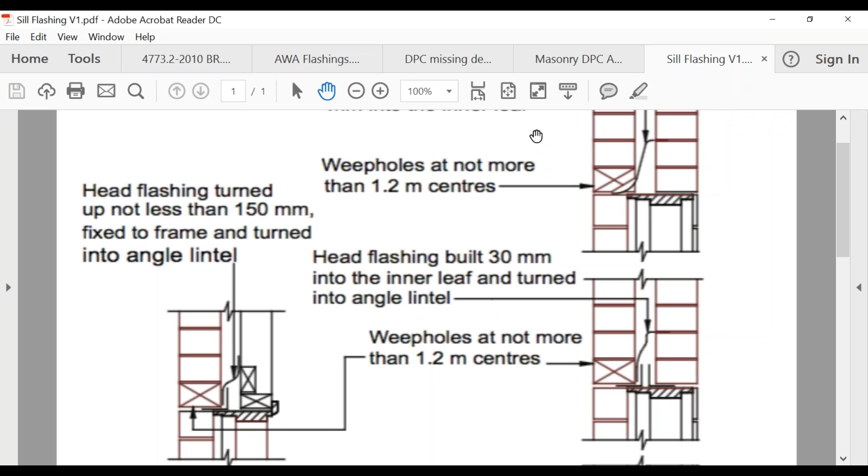One thing I'll show you, you'd have one copy of this, probably just one page. I think you guys have this in your study buddy, that folder you get given when you come to class, but I've got the whole booklet. I'm going to send this out to everybody tonight.

This is basically the Australian Window Association document, and it steps through how something should be installed, how it should be flashed, and so on. It's a pretty good document where it gives us, as far as the industry is concerned, how we should correctly install windows and doors.

I'll quickly flick over a couple of parts of it. This is just your normal standard-type layout - it talks about the objectives, who they acknowledge, and so on. We're more concerned with the contents, which talks a little about the building code and things like that. But then we get to installing frames correctly.

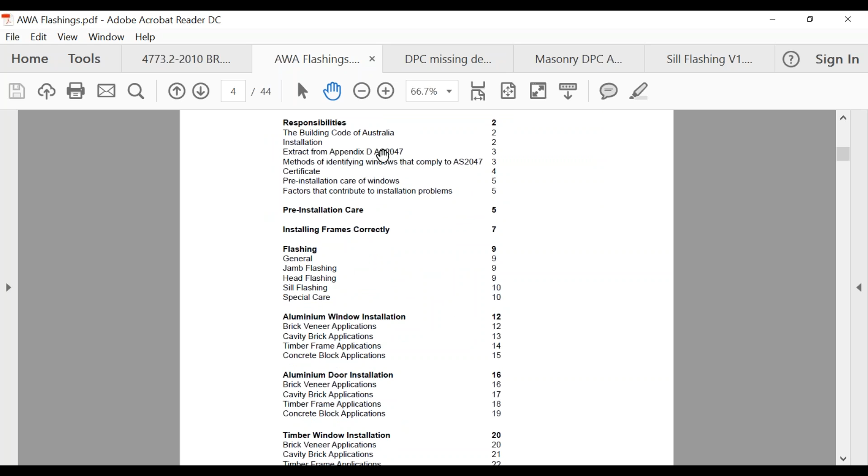When we get to our flashings, it's broken down into general flashings, our jamb and head flashings, our sill, and then aluminium windows - how we'd do that on a brick veneer application, cavity brick, timber frame, and concrete blocks. Then the same sort of thing for aluminium doors, timber window installation and timber doors, then UPVC window installation and the same with doors.

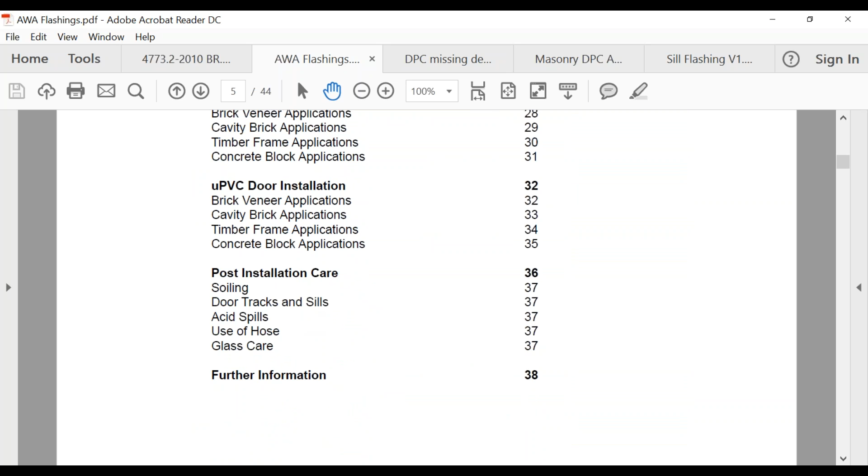And then it talks a little bit about our post-installation care. So something you're not overly familiar with is flashing of your windows. This is really a great tool for that, and it's pretty easy—you can just look at some of the pictures.

So this is pretty basic stuff too, but it starts to show you about when they actually get delivered on site, how we should be basically storing them and things like that, which is pretty self-explanatory.

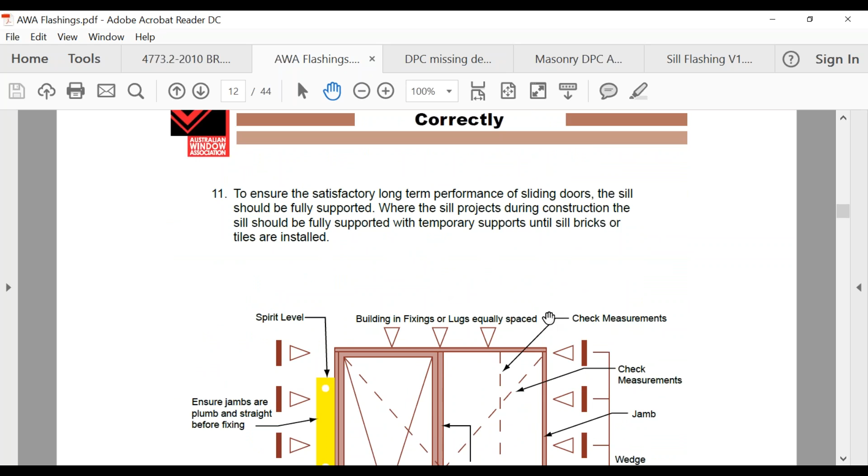But I just want to scroll down to some pictures, and this one even talks about, if you're like a DBM and you're not too sure how windows get installed, it starts to basically show you how we should be installing it, how we're checking it for plumb, how we're checking it for level, and it talks about putting wedges in the side so it actually stays plumb and level. Then it says something about having a gap at the top, between the head of our window and our lintel, and it talks there also about the fixings we should be using.

And there's some stuff here that talks about flashing, and I'm just going to quickly go over the different photos that it shows us, because it'll make a bit more sense.

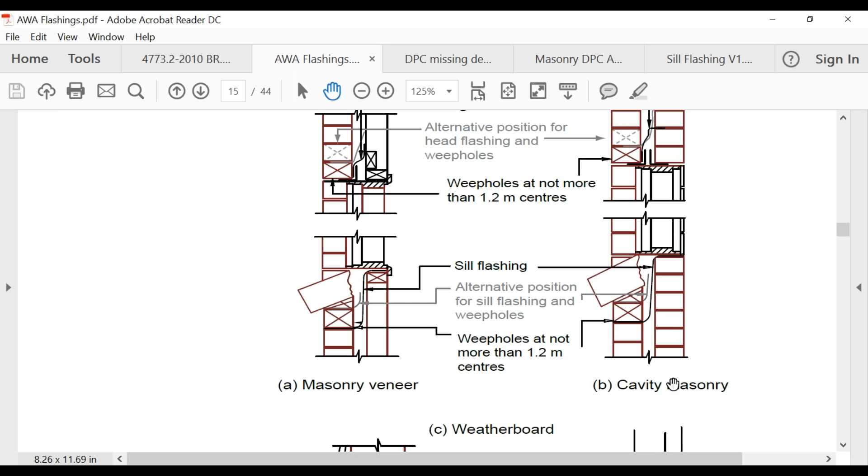I think this one here is very similar to the ones you guys have got in your book—I'll make that a little bit bigger. So it's basically showing us here that this is double masonry, or full masonry, or what they call cavity masonry, and it's showing us here we've got our sill brick, and we've got a couple of different alternative positions on where we can put that sill flashing underneath, and then it's got our weep holes and so on.

And then it does basically the same for above our windows, and then it gives us some alternatives down here for our weatherboards. So you probably heard me talk about it before, guys.

I'm actually from Queensland, and pretty much everything I ever did was weatherboard, and these are some of the different flashings we used to have to put in basically under the lap of the weatherboard, and then come over our window so it didn't get in. And then some sill ones you can see here as well.

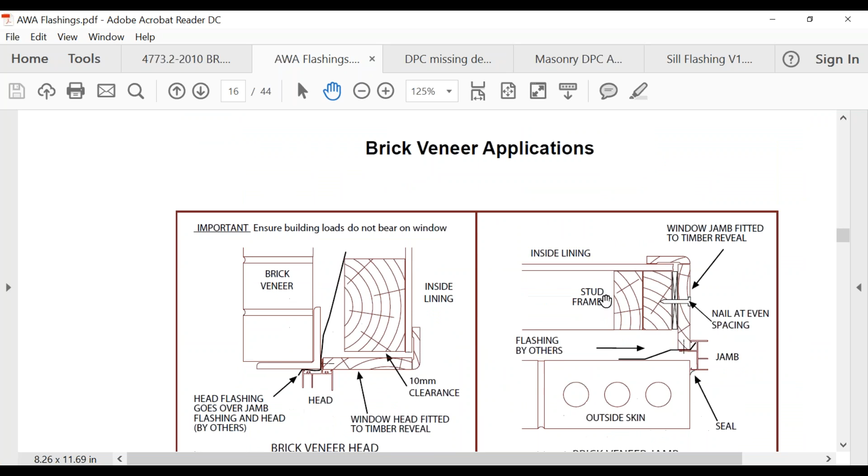So then it gives us some other ones showing us this in our brick veneer applications. So it's obviously showing here this is our brick, this is our lintel, and this is the internal linings with our lintel and so on, and then how that needs to be flashed.

So we can see that going up to our frame, coming down and then coming out there underneath our lintel so the water comes out. So you'll see there's different scenarios for it. There's probably a better close-up picture of how that sill flashing works, and then the alternative where it actually sits under the sill brick.

And I just want to show you too, there's some other ones here where it starts to show us about our aluminium windows when we're using our core-filled blockwork. So on these ones here, this is your concrete block applications.

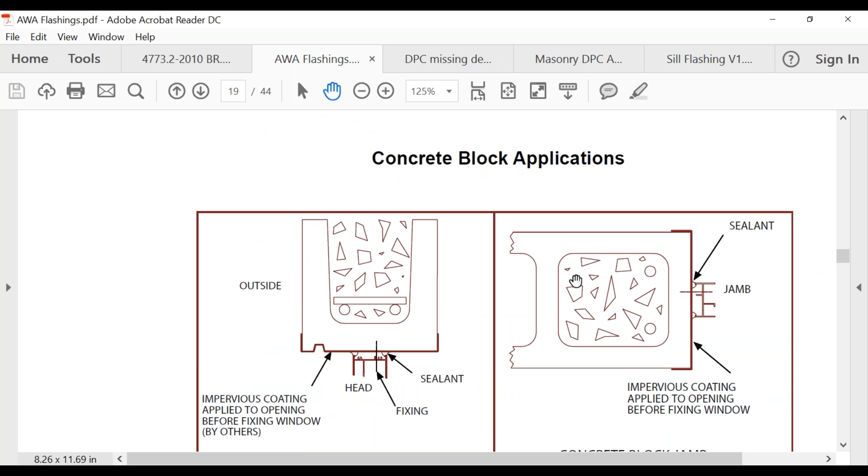This is another thing too, which was quite big when I was in Queensland. I see it a little bit down here in Victoria, where people, probably more for basements and stuff like that, use the concrete blocks and they core-fill them. And it starts to show us here how you can get these sill blocks and how the windows are fitted in with our sealant and so on.

And then you can have your sill tile—that's pretty common, I know you guys have seen that a fair bit. And then they have some sort of lip here, I suppose, which basically stops the water getting under our frame, and then it comes onto our sill brick and comes out. So there's a few different scenarios there, and then it goes on to our doors and so on.

So I'm not going to read through it all with you or be here all night, but I will actually email that over, and I just wanted to touch base on it because you guys get this picture here in hard copy, and that's about it. But I think that's a pretty handy document, especially if you're not physically installing windows and you want to know a little bit more about how it needs to be done.

From here, I'm going to go through the Australian standard and talk about things we need to understand, including terminology. I'm a shocker for calling stuff what I call it on site, and then when I open up the standard, it's not called that. What I call brick veneer is referenced as masonry veneer, and what I've always called double brickwork is called cavity masonry - that's two walls of brickwork with a cavity in the middle. We want to get familiar with the terminology, so if we're asked to do a design and they say masonry veneer, we know they mean a timber frame with one skin of brickwork on the outside.

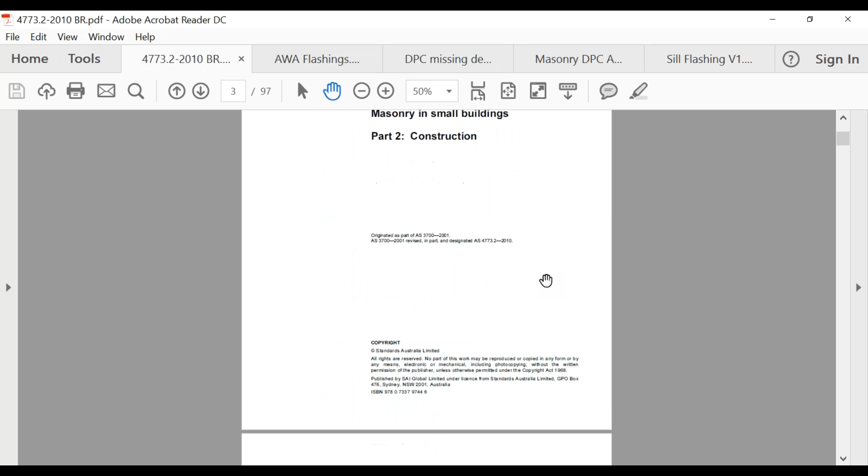A few other things I want to talk about are the different types of control joints. I'll work through here and highlight the parts I think need attention. I find this standard, maybe because it's not as big as the others, pretty easy to navigate through. If we don't have any bricklayers here, I can probably say we wouldn't make it too big for them, otherwise they wouldn't understand it. So bear with me as I scroll through the pages - you might hear my hard copy flicking over as I'm scrolling down.

The first is on page 9, and I'll make it bigger so you can see it. With your brickwork, you have what are called control joints. A lot of people just call them contraction joints, or expansion joints, or articulation joints, and aren't aware they're actually control joints - but there's actually 3 different types. It says joints or gaps constructed in masonry to control and absorb movement in the masonry.

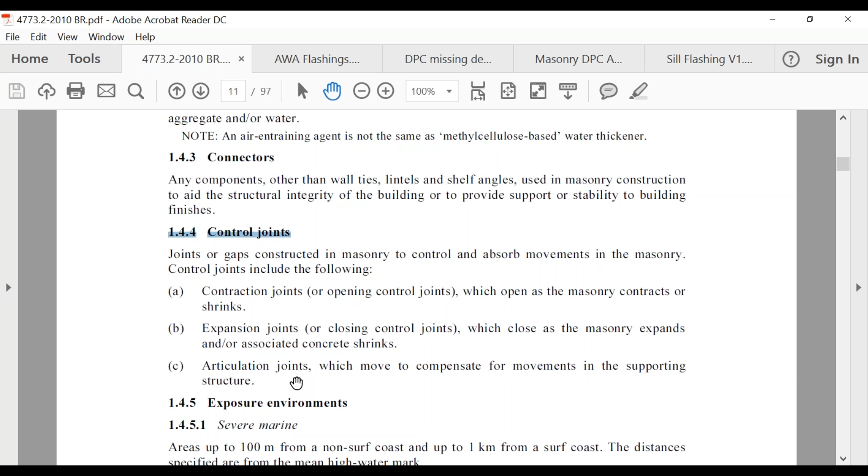Control joints include the following: contraction joints, which open as the masonry contracts or shrinks; expansion joints, which close as the masonry expands or as the associated concrete shrinks; and articulation joints, which move to compensate for movement in the supporting structure. It's probably not something you'll be asked in your interview, but it's worthwhile getting familiar with it, because you might see a question about a contraction joint and think, hang on, isn't that an articulation joint? All 3 are actually control joints, and depending on what we're trying to control depends on which one we use. When I go through the standard I'll explain in more detail what they actually do.

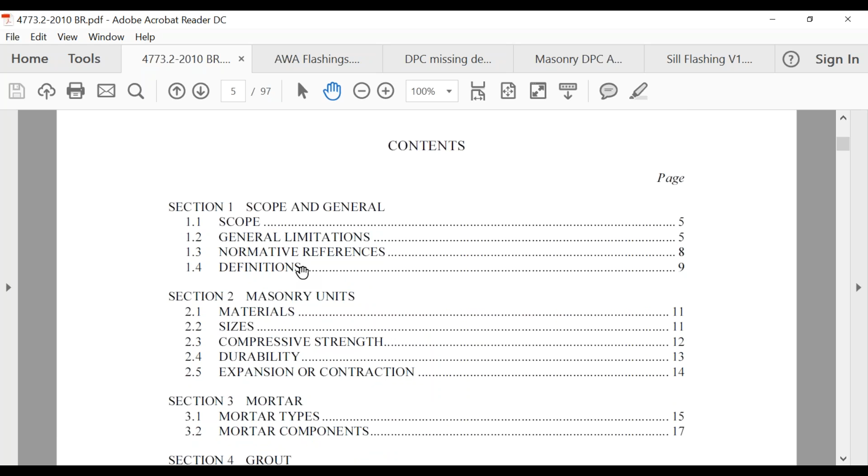When you're reading any of your standards and you're not too sure exactly what something is, come to the front of your standard where it's got definitions. You go to the definitions page, or back in the table of contents, and you'll see under section 1 is normally our definitions. So if you're unsure of something and think, geez, what's that, you go to your definitions section and it'll probably tell you what it is.

Even with stuff like single leaf masonry or similar terms, if there's any wording you're not familiar with, go to your definitions as your first point of reference to try and understand it, in case you're stumped in your multiple choice or during testing. As we covered when we did slabs and footings, if it's a symbol, you'll usually find it in the definitions under symbols.

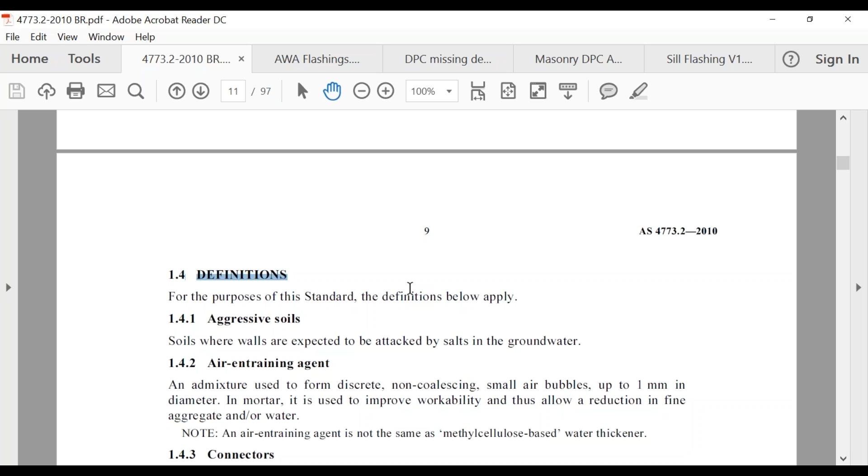So if it was a symbol, say DS which had to do with the depth of our pad footing, or that might have been DL when we did our Australian Standard 2870. If you looked under DL, you'd go, oh, it's not there. But when you scroll down further, you'll see there's a section in the definitions that relates to symbols, and all those symbols and abbreviations are under that section. So that's a little bit on our control joints.

I'll scroll down and show you the parts I mentioned that I think we need to highlight. But we'll do a few little things too if you haven't done this exercise or module before, just trying to find some random things in the standard.

There's one in there that's got to do with something to do with marine grade. I've got the question here. Yeah, like the durability of the mortar, and it talks about a marine grade.

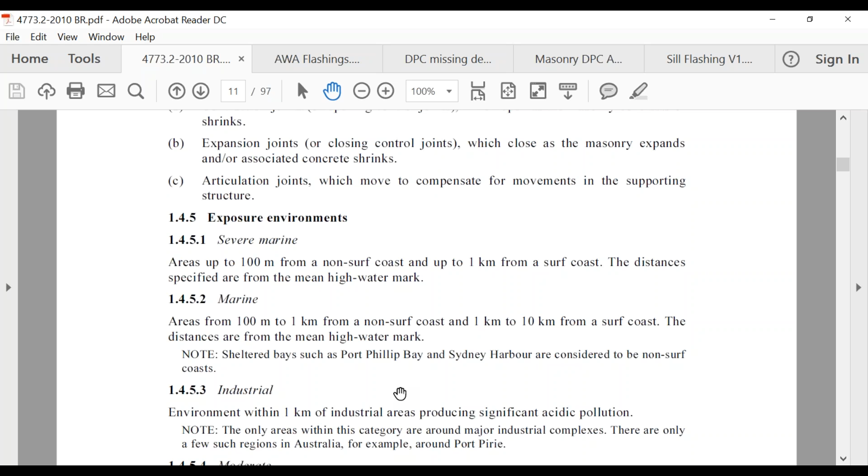Now, something like that, you're probably not going to be asked in your interview, but it's just things like that to try and get you used to being able to navigate through these standards and codes we use, because we can't always give you exactly what the VBA is giving you, as they might change it tomorrow. So you want to have that skill set on your own to actually find something, not just me showing you where it is in the standard.

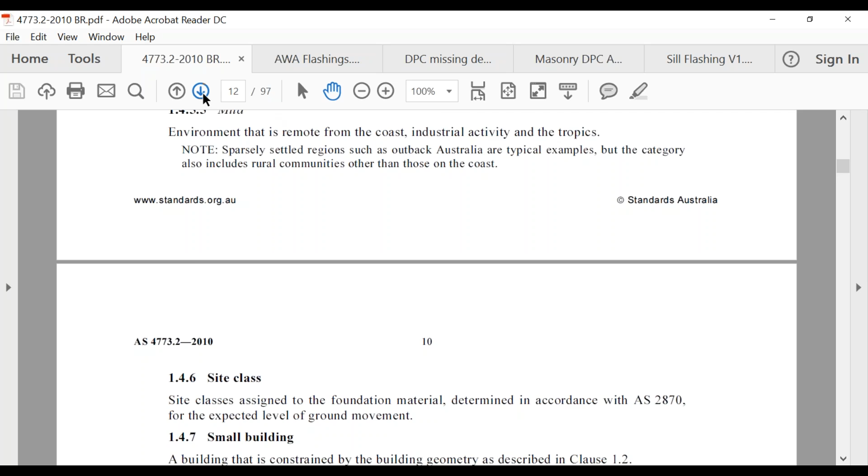All right, just bear with me and I'll find this next page that I need to get to so we can talk about it and highlight it. This is something we did basically a couple of weeks ago. I'm sure we've covered this enough before, but it is actually in your standard.

A few weeks ago we spoke about where our vents need to be for our subfloor ventilation, and it's actually in here as well. This is very similar to what's in our building code, and it tells us that in our brickwork, the vents need to be placed no more than 600 millimeters in from the corner.

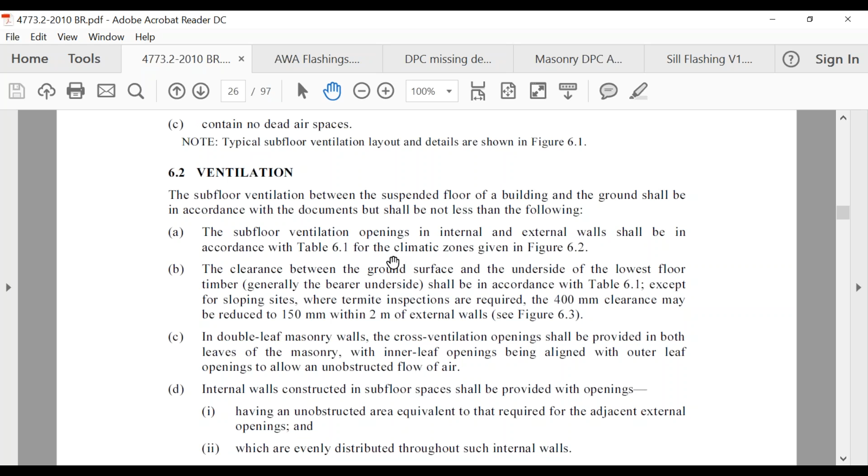And back here, if you needed a bit more reading on it, it does talk about the ventilation in there. But we would have done a lot of that when we covered our subfloors and highlighted our building code then. One thing we did do when I spoke to you about subfloor ventilation was about the different climate zones and the amount of square millimeters those vents need to be for every linear meter of wall.

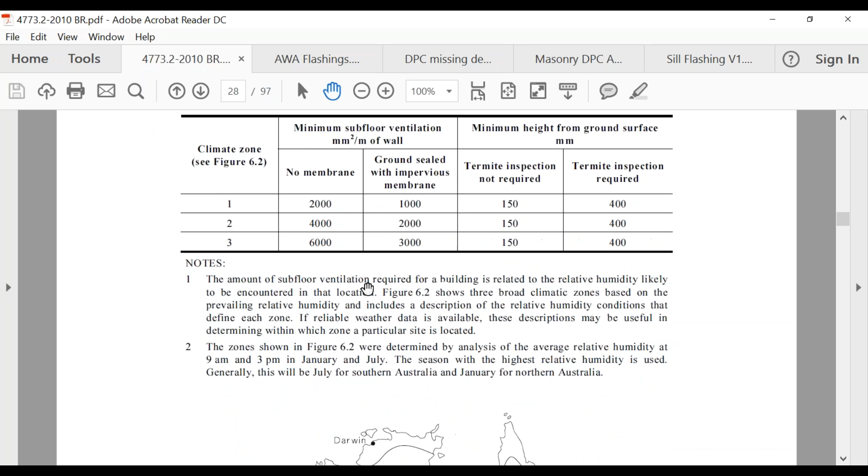So this was in our building code, but it's also in your standard for masonry as well. If you're wondering how that works, it gives you a bit of a definition down here about the different zones we use, and those zones are related back to this table. But it's very unlikely you'll be asked that - you might be asked what the zones are, but you're not going to have to remember how many square millimeters a certain vent is, like we did in class.

All right, so this is one thing. I haven't had any feedback from students that have gone through and been asked this, but this was one thing that Steve, the training manager, used to make sure the guys highlighted so if they were asked they could find it. It's got to do with our engaged piers. So the main part is this part here. I'll just read through it.

It says, when we're using engaged piers, the spacing of engaged piers shall be specified in the documents and when constructed shall not vary from the spacings by more than 20%, and the thickness of the engaged piers shall not be less than the greater of - so they shouldn't be any less than 100 millimeters, and that's including the 10 millimeters of mortar.

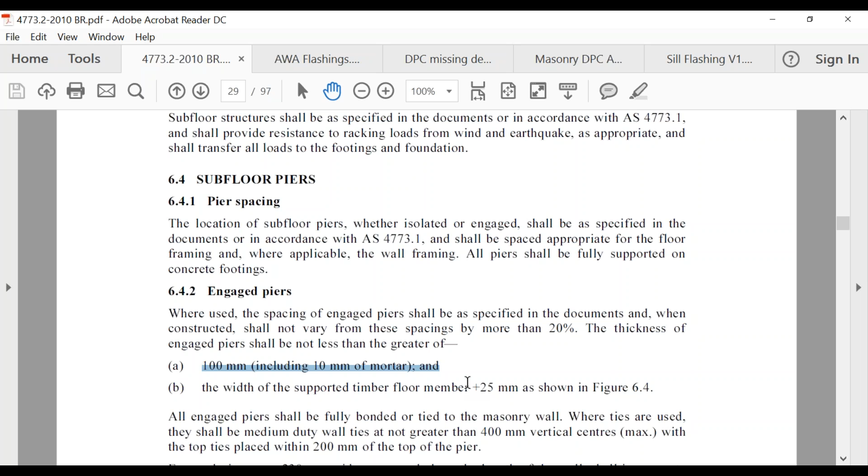So yeah, that was just one thing some guys were occasionally getting wrong in a multiple choice. So I've just highlighted that. If you guys got that question, no doubt you'd be able to look in your Australian Standard, find your section on engaged piers, and hopefully that would then stick out to you because you've highlighted it.

I did brush over this, but only because we covered it a few weeks ago. This is exactly what was out of our building code, showing our minimum height requirements, basically 150 down to 400 over a 2 metre period. And then it shows us obviously we've got our vent passing through there.

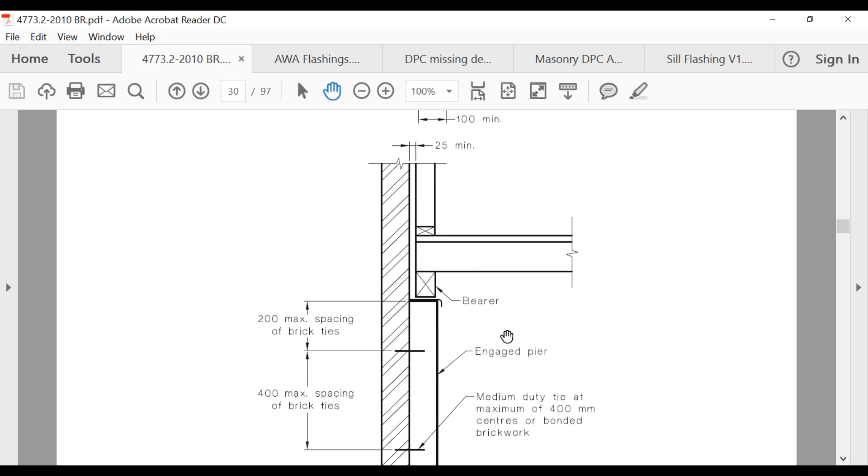It depends on how you like to find your stuff in your building code. Personally in my standards and building code, I'm sort of more of a visual person, so I actually highlighted this one here where it's showing our cavity. This one shows we've got some sort of engaged pier, our bearer sitting on it, then our joists, our flooring and our wall, and then it's got our cavity. So our cavity on that is a minimum of 25 millimetres.

We'll actually cover that a little bit later in the standard where it talks about what our minimums and maximums are. But like I said, I'm a visual person - if I'm flicking through something quickly and I see a picture and know that's got a cavity on it, I've just highlighted that in mine as well. Whether you choose to is up to you. But yeah, that's basically showing we've got a 25 minimum cavity there.

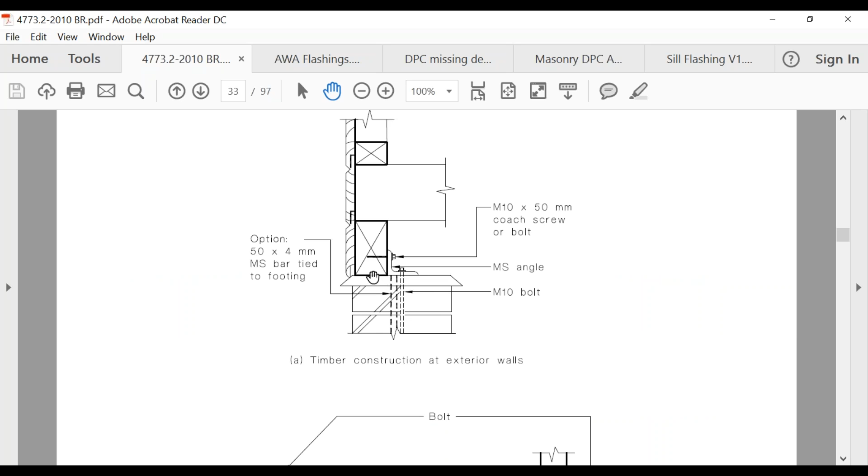I'll just scroll down to the next one we need to talk about. If you're not familiar with this, guys, some of this wouldn't be what you'd be asked, but it's really easy to navigate. This section is showing us different ways to actually tie down onto our piers, basically with our bearers and so on. So it shows here we've got this metal angle, and then we've got our bolts coming down, how far down they've got to go, and then what size the actual bolts have to be themselves. So a little bit of information there on our anchoring.

And so this here is the stuff that I wanted to start explaining. This is our control joint. If you think back 5 or 10 minutes ago when I showed the definitions and we spoke about our control joints, we said how we had articulation joints, contraction joints, and expansion joints. It actually gives us a little bit of a definition here.

So if you're wondering what they are: the articulation joint reduces cracking caused by footing and other structural movements. A contraction joint reduces cracking caused by contraction of the masonry units and concrete shrinkage in the supporting structure. And the expansion joint reduces cracking caused by expansion of masonry units, predominantly clay. So that's telling us why we use those different ones - a little bit of information there about our control joints.

And then when we come down, this is the stuff where you definitely need to know these answers. This starts to talk about our articulation joints. I'm just trying to find it here for me. So this is what we're after here - this would be something you'd probably get in a multiple choice.

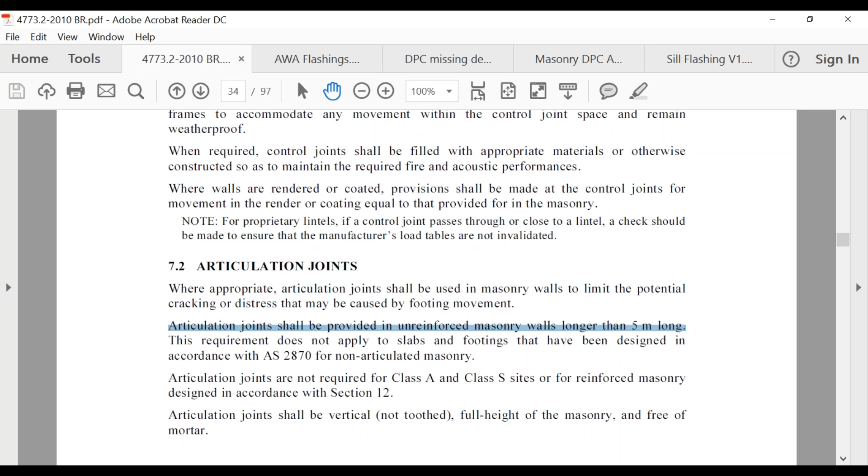Articulation joints shall be provided in unreinforced masonry walls longer than 5 metres. So basically longer than 5 metres, we need to have an articulation joint in. And when we scroll down a little bit, it talks more about how they're not required for Class A and Class S sites and things like that. So you can just read on a little further to see which sites we do and don't need them for, but basically 5 metres is the key we're trying to highlight there.

When we get down to letter F, there's a bit more information on the articulation joints. It tells us they need to be within 4.5 metres of all the corners, but no closer than 470 millimetres for cavity walls or 230 for veneer walls. You might want to highlight that, it could come up in your multiple choice, and depending on your license, if you're a bricklayer, that's something you'd be expected to know off the top of your head. But if you get cold feet in the interview, you could reference your standard and find it there.

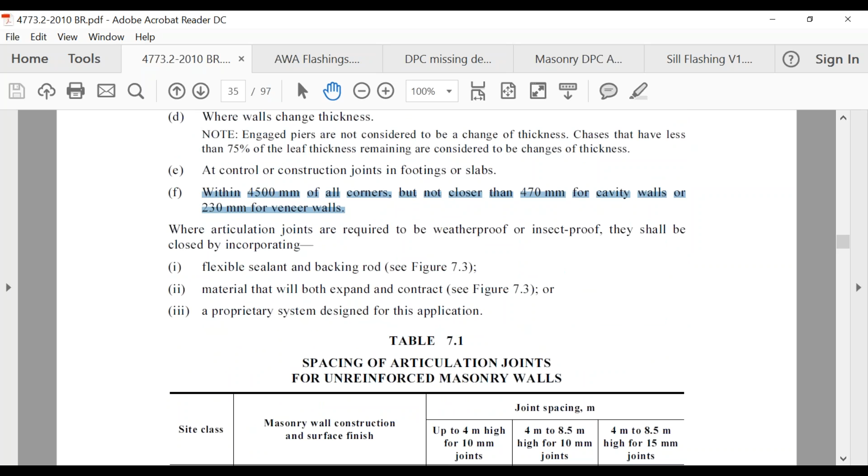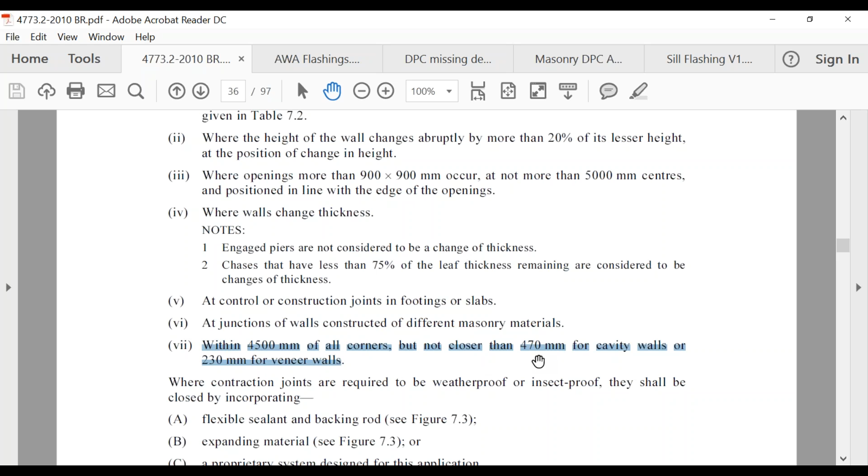The next section of the book moves on to contraction joints. These are pretty much exactly the same as the past measurements we spoke about. Under Roman numeral 7, it tells us the same thing: within 4.5 metres of all the corners, but no closer than 470 millimetres for cavity walls or 230 for veneer walls.

The next section is a table, but don't worry too much about that, we don't seem to get guys quizzed on it, though you'd find it easily enough. It's basically for spacing of contraction joints for unreinforced masonry walls, with information depending on the height and things like that.

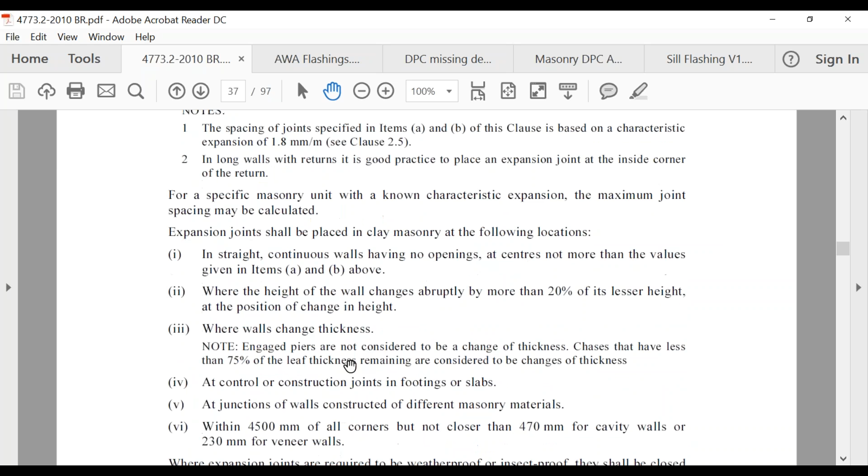The other one we get quite often in your multiple choice has the same measurements again, this time for expansion joints. So whichever control joint we're using, they're the same measurements anyway: within 4.5 metres of all corners, but no closer than 470 mil for cavity walls or 230 millimetres for veneer walls. I'd basically highlight those ones, because once you know those figures, they're exactly the same for all the types of control joints we use.

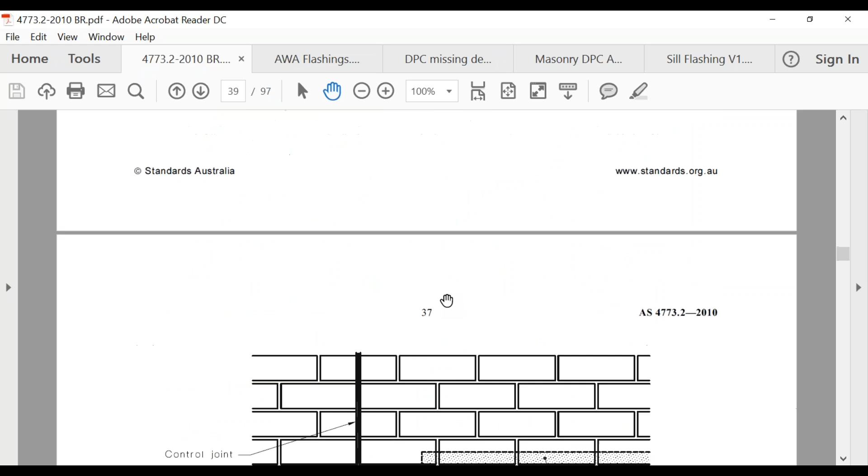Bear with me a second. If you're not too sure how it all works, you can read through this in your own time if you're that way inclined, and we'll talk about this a bit more later on.

Next is the lintel, and we'll talk about the bearing, basically how far it has to be supported. It shows our control joints in different ways of actually doing the control joint, up the side of the window and beside the lintel and so on. So if you're wondering why you might see different things on different sites, this section specifies the way these control joints can be done around our windows.

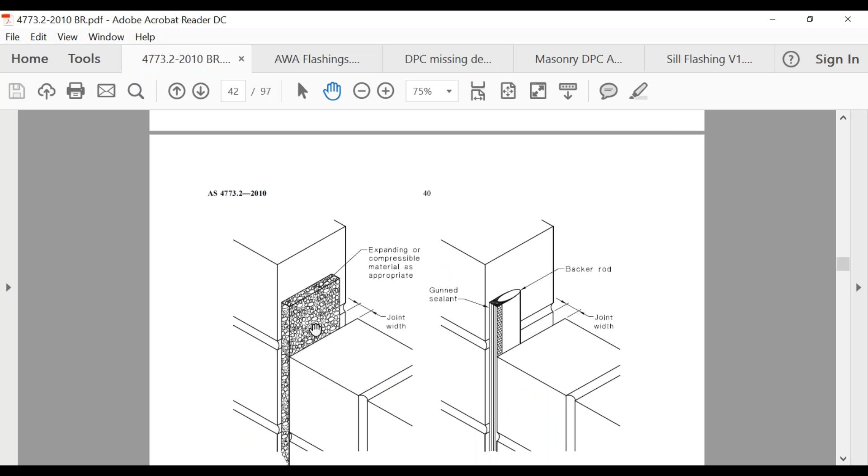Scrolling down, there's a bit of information showing us the different options, whether we're using a backer rod, or expanding or compressible materials and so on. This is basically information for guys who need to install those, but nothing you'd be quizzed on.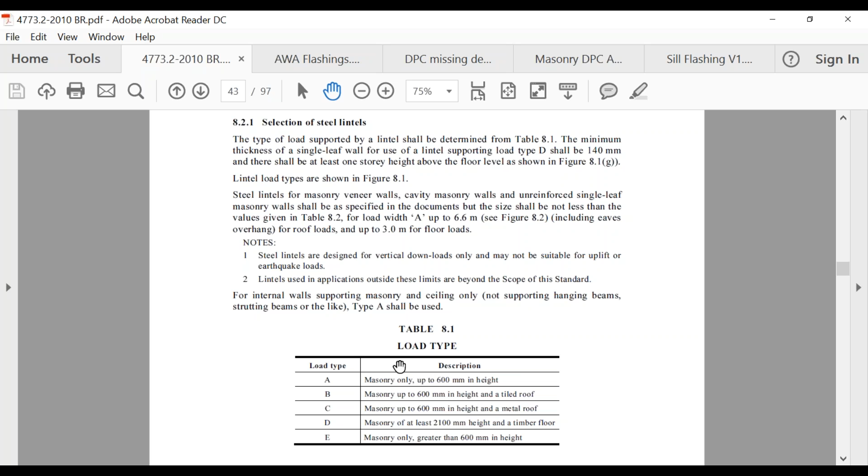But if you wanted to know, this section basically determines the load type on the lintel, with a description of how you can determine what size lintel you need to use. It then shows a few different scenarios: a timber frame with brick veneer on the outside, double lintels needed for double brickwork, a single skin which is type B, and it goes through the different types of scenarios there.

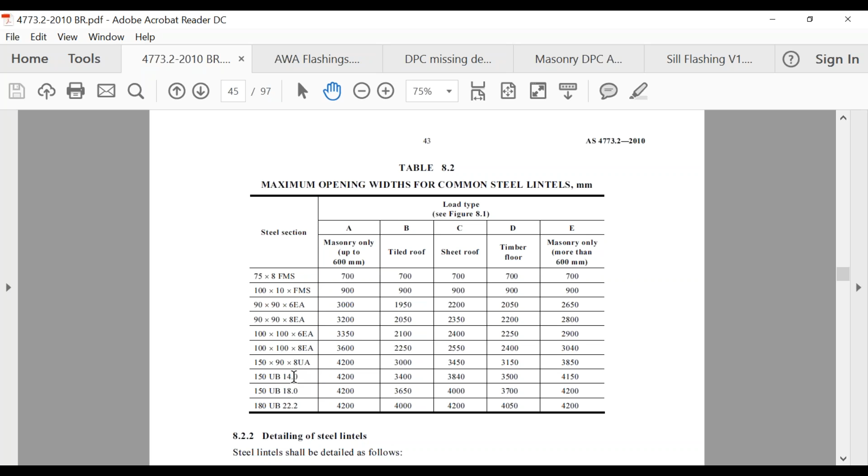So not something to be quizzed on, but if you want to know a little bit more about determining the load width, you can go through this section. Just like we did with our standards to work out what size bearer we need, we use that standard to work out what size lintel we've got. We determine the load type—A, B, C, D, or E—and what type of roof we've got, how big the masonry is and how big the opening is, and that tells us the size of the steel lintel we need. But for this exercise, nothing you need to be too concerned about, though it's easy to find if you want to read on it.

Some terminology we might not be familiar with is the bearing length. If you got asked what is the bearing length of the lintel, it's just basically asking how much of that lintel needs to be supported. So when you look here, it's showing us that's our opening, that's our lintel, and it's supported on the brickwork.

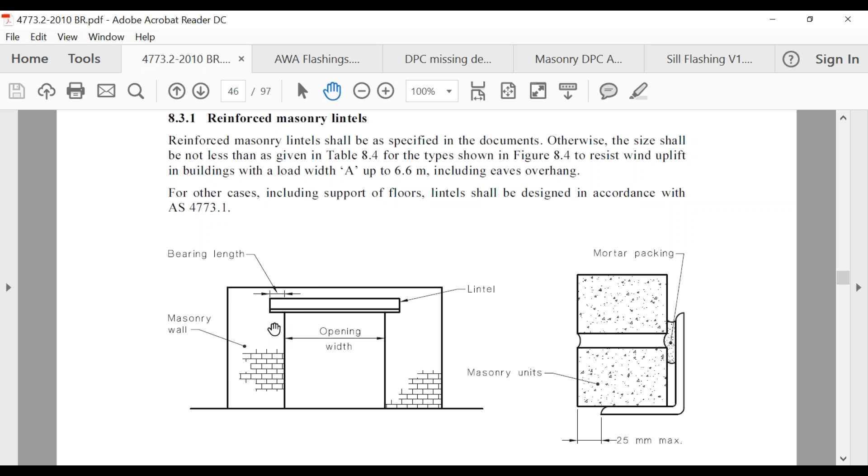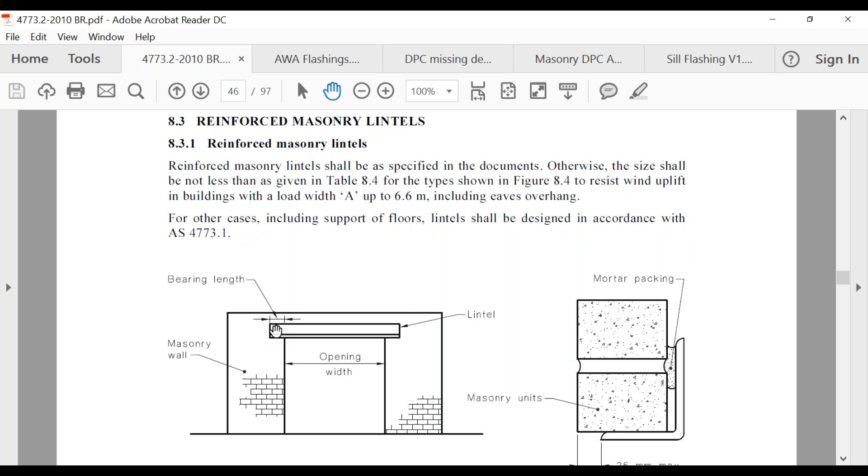It also shows us that the maximum the brick can overhang our lintel is 25 millimeters, and we've got to have our mortar packing down the end. When talking about the minimum bearing length, it'll be in this table—depending on the size of the opening, if it's up to 1 meter, it's 100 mil either side, and if it's over a 1 meter opening, the bearing length has to be 150 millimeters. Remember, this is always a minimum, just like everything we've been doing so far—if you go a bit extra, not an issue, but it can't be any less than that. So that's some information about bearing lengths for different types of lintels.

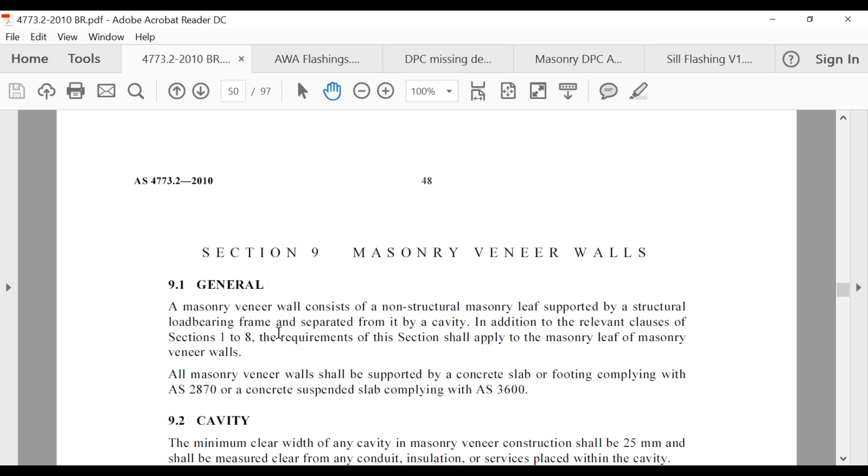As I said at the beginning of the presentation, I get caught out all the time using the wrong terminology, and this is where we start to talk about masonry veneer walls. It tells us a masonry veneer wall consists of a non-structural masonry leaf supported by a structural load-bearing frame, separated by a cavity. A lot of us probably call that our brick veneer.

That's where we get information where it says you can highlight this, because it's something you'll definitely have to know in a multiple choice. We highlighted it before on that picture, but it says for the cavity, the minimum clear width of any cavity in masonry veneer construction shall be 25 millimetres, measured clear from any conduit, insulation and services placed within that cavity. That's one question you're definitely going to want to know.

When we get to the next page on page 49, we start to talk about our damp-proof coursing. You'll see damp-proof coursing is abbreviated to DPC. Quite often people go, geez, what's DPC? Same thing, if you weren't too sure, you'd be able to go to definitions and find it. But if you're not familiar, DPC in the standard is damp-proof coursing. For this next part of the standard, we're going to go through our damp-proof coursing, our flashings and our weep holes.

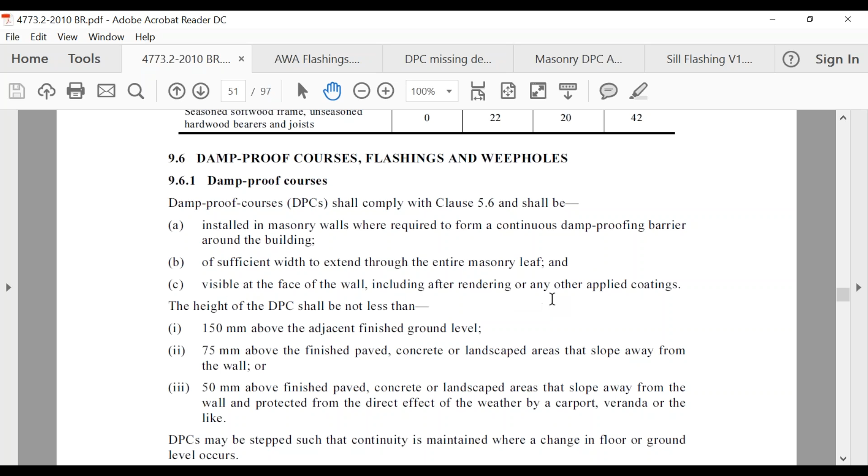It tells us down here that it needs to be visible—this is our damp proofing. It needs to be visible at the face of the wall, including after rendering or any other applied coatings. And the height of the damp coursing shall not be less—these are the measurements you want to know.

The damp proof coursing can't be less than 150 millimetres above the adjacent finished ground level, 75 millimetres above finished paved, concrete or landscaped areas that slope away, or 50 millimetres above finished paved, concrete or landscape areas that slope away from the wall and are protected from direct effect by weather by way of a carport, a veranda or the like. And that's something that doesn't always happen.

One of the guys in my face-to-face class was telling me, I can't remember exactly how it worked, but something happened where an insurance company wouldn't insure a house because the concrete had been put around the outside of the building, with paths made too high, not complying with this part here. So the concrete had to be pulled up and redone to meet these requirements.

There's a lady who works for a volume builder, I can't think of their name, but she does contract signing in the office, and they've got something going through VCAT at the moment about the height of the weep holes. She told me this about 7 or 8 months ago, so I can't remember the exact story, but it got signed off by their building surveyor. The builder had engaged their own private surveyor - this was back when the builder could choose the surveyor. So the volume builder used a surveyor who was probably just ticking and flicking through due diligence.

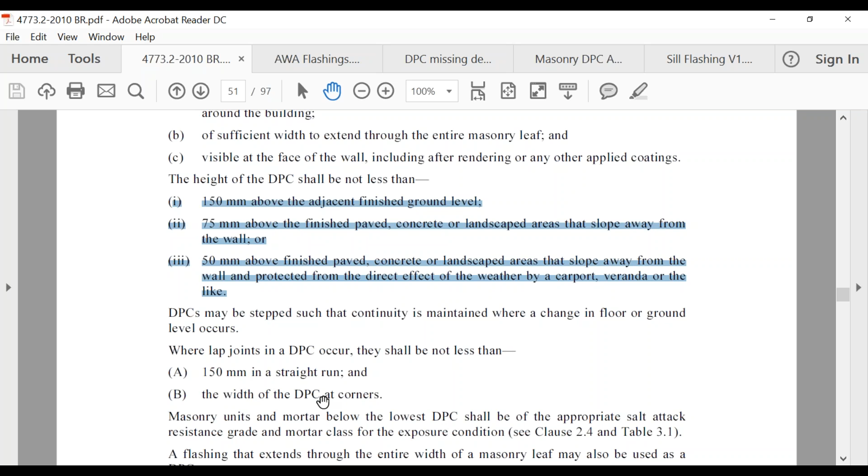Down here, something you want to highlight also - it talks about the laps in our damp proofing. So if we're lapping our damp proof coursing, they need to be 150 millimetres for a straight run, and at a corner it needs to be the whole width of the damp proof. We'll probably see some pictures of that coming up shortly.

On the next page it talks about our flashing and weep holes, and we really want to understand these measurements - you'll understand this better later when we do our drawings if you haven't done them before. It talks about cavity flashing, which needs to be turned up a minimum 150 millimetres on the inner frame, and fixed to the inner frame at 600 centres maximum.

The lap joints in our flashing need to be, just like our damp-proof coursing, 150 millimetres in a straight run, and if lapped at corners, by the width of the leaf and the cavity in accordance with figure 9.1. You'll want to highlight those, and then the other part to highlight is the spacing of our weep holes.

Down here it says veneer walls shall be drained by weep holes at 1200 millimetre maximum centres. So every 1200 millimetres we've got to put some weep holes in.

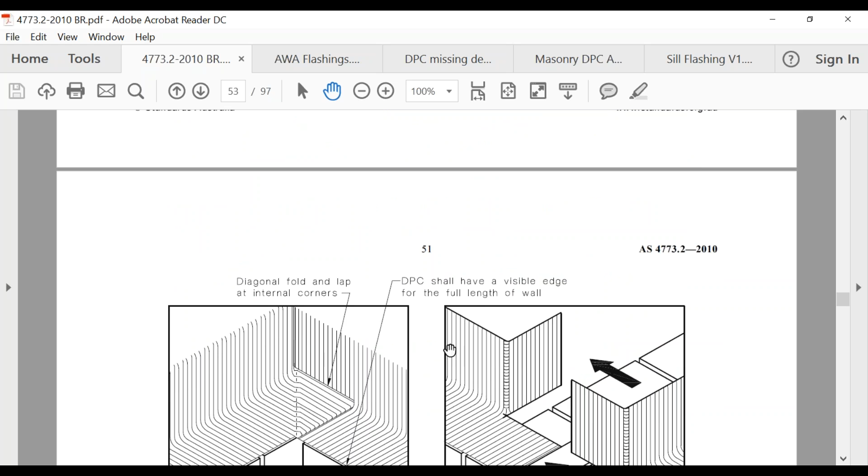So if you're wondering how that damp proofing works, here's showing the damp proofing and how it needs to go over the corner. You can see the way they've cut it, it does lap the whole corner of the brickwork - that's showing our internal flashing lap. I'll just move on to these next parts.

So then it talks about how far we've got to embed these corner flashings. This is talking about our sill flashings, and that's just another picture there showing around the external corner.

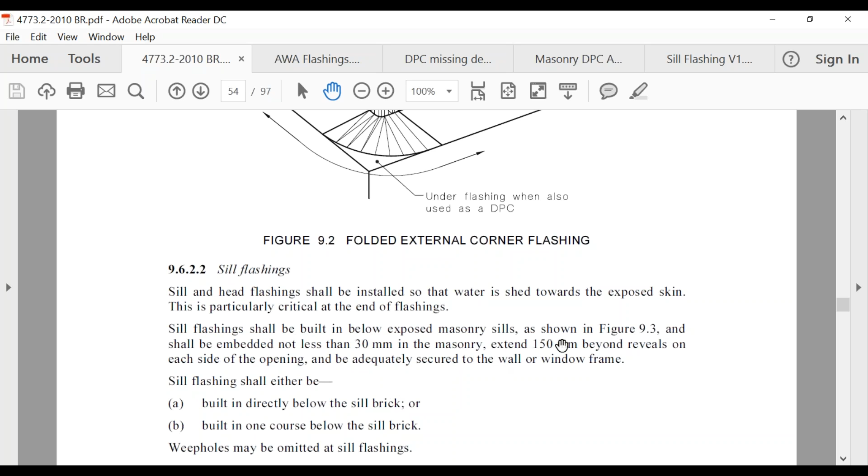When we move on to our sill flashings, the measurements we want to know here, we might be asked in our interviews or multiple choice, is this one. Sill flashings shall be built in below exposed masonry sills, as shown in figure 9.3, and shall be embedded not less than 30 millimetres into the masonry and extend 150 millimetres beyond the reveals on each side of the opening. It does say sill flashings shall be either built in directly below the sill brick or built in one course below the sill brick.

And that's what we saw on this picture. I'll just make that a little bit bigger for you. It basically gave us the two options here, where it can come under the sill brick or it can come under the brick here and have the weep holes on it.

But then when we read a little bit further, it does say that weep holes may be omitted from our sill flashings. So, yeah, I don't know, to me it doesn't make sense to have the sill flashing there if it's just going to come straight out the side.

But obviously what it does do, if I can bring up the picture, if the water does get in there, it just spills over the side of that flashing, goes down our cavity, and then basically out our bottom flashing through our weep holes. So that's a little bit of information there, you just want to know how far it needs to be embedded and how far it needs to extend.

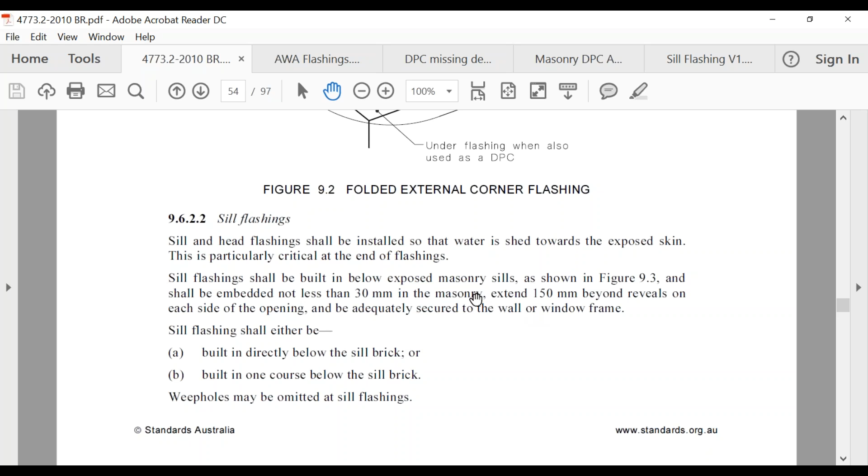And it does actually give us also some pictures over here. I might just read on a little bit before I come back to that, because this talks about the location of sill and head flashings. I'll read through this and then come back to these pictures here.

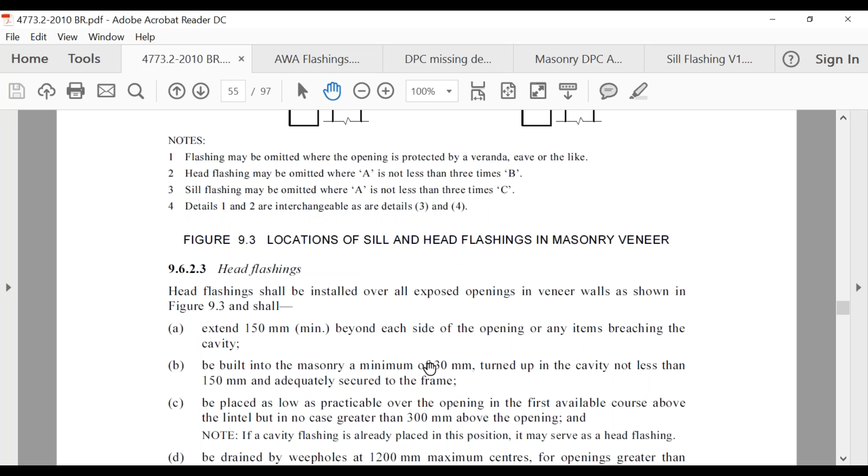Basically what we want to know with our head flashings, they shall be installed over exposed openings in veneer walls as shown in figure 9.3, which is this picture here above us. We want to be familiar with these measurements, guys. It needs to extend, like before, 150 millimetres beyond each side of the opening. And on this one, be built into the masonry a minimum of 30 millimetres and turned up the cavity no less than 150 mil. Then down the bottom, be drained by weep holes at 1200 millimetre centres for openings greater than 1200 millimetres.

So it does talk about whether we need the weep holes and so on above the top here, and there's different formulas. It just says flashings may be omitted where the opening is protected by a veranda, eave or the like, and the head flashing may be omitted where A is not less than 3 times B.

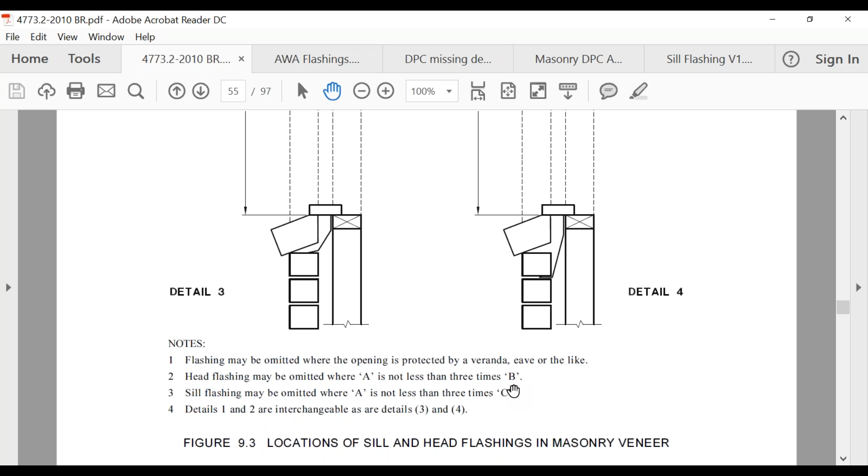We're not going to go into this tonight because we're not really asked about it in this much detail when you go into the VBA, but you just got to work out your measurements, know how big the opening is, then look at it here and say, okay, this is what A is, this is what B is, use the formula down the bottom. That's why sometimes if you're doing stuff on site and you think, why is there no weep holes here, it might have something to do with using these formulas underneath here.

All right, so let's scroll on to the next part that we want to talk about. We want to know a little bit about our wall ties. So this is now on page 56. I'll just get down there.

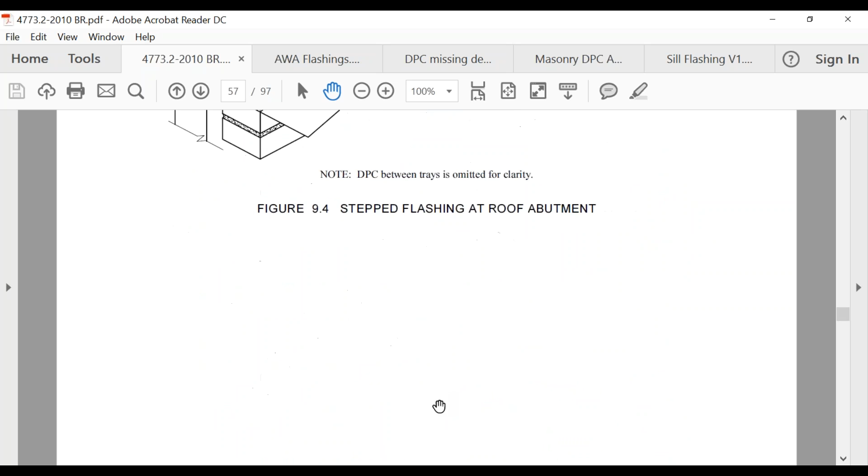With our wall ties, basically it talks about ties should be placed in such a manner that they're within the distance within our control joints, basically from the ends and the top of the walls. And the big one that we get, if you're doing your multiple choice, you're probably seeing already, is that one there: in all cases, the maximum vertical and horizontal spacing shall not exceed 600 millimetres. So a bit of information there on wall ties, and the most common one guys get is the 600 millimetres.

And then when we come down to this next table, it shows us here basically the duty ratings for type A veneer ties.

Same thing here, nothing you'd necessarily be asked in your interview, but some guys have asked me this before. It's just like using our span tables with our 1684. What's the horizontal spacing? What's the wind rating we're using? And what is the wall type? From there we can determine what type of wall tie we need - light duty, medium duty, or heavy duty - and that's how we determine basically how strong that wall tie is going to be.

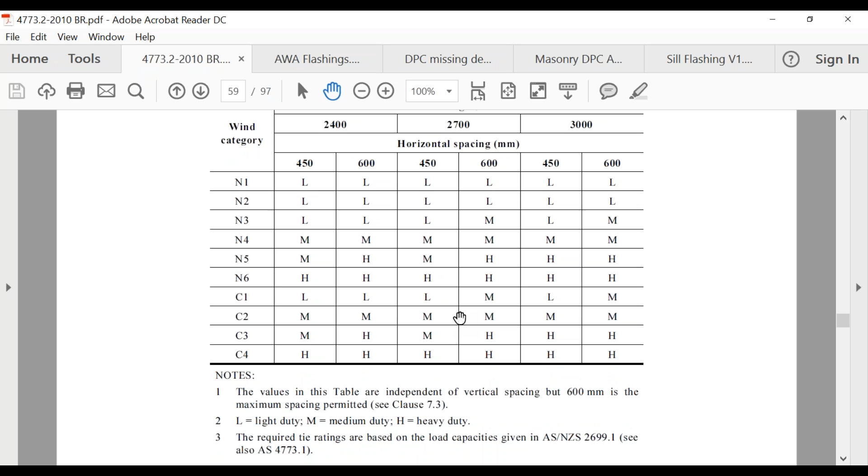But what we also need to understand is this part here - the ties need to be embedded at least 50 millimeters into the masonry leaf. So obviously if it's only in there 10 millimeters, it's not going to be in far enough. Just like when we're fixing a wall frame and we had our nominal fixings, and it spoke about how big the nails had to be for certain size top plates to go into the stud - it's no different for our wall ties. They've got to be embedded into the masonry leaf at least 50 millimeters.

So we're going to scroll on past these next couple of pages.

I've got a question here from Tom. Just give me a second there, Tom, I'll just read it.

So this is a question Tom's just asked me. He says, why would the damp proofing at the bottom of the weep holes have to extend through the entire brickwork, and the head flashings only have to be 30 millimeters? Mate, to be totally honest with you, I'm not too sure why that is, because as long as it's basically in the brickwork, it's going to run out through your weep holes anyway. I was wondering if it's got to do with being able to inspect it, and that's why - because it says it needs to be visible even when it's being rendered. So I don't know if it's for visibility for inspection reasons. Maybe that's why it's there, but I'm not 100% sure. That's the only reason I can think of to say that's actually there. But I honestly, other than that, I don't know.

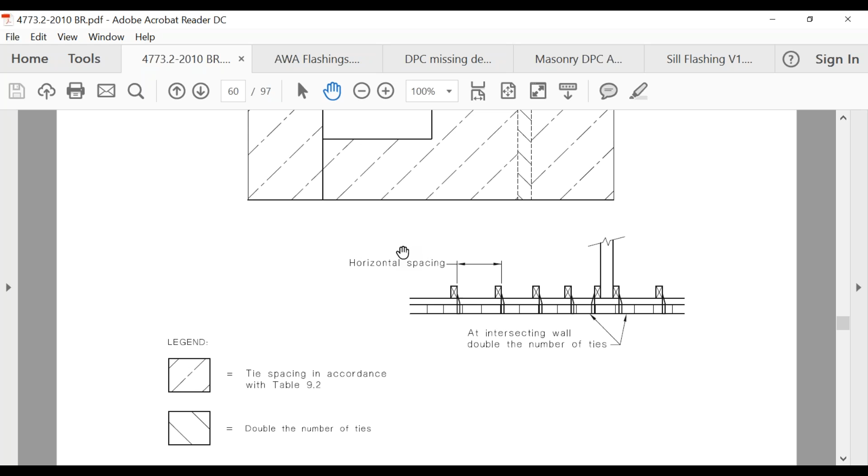After that, the client requested that guy had to come up and basically pull up all the decking boards and turn them over and nail them the right way. As you can imagine, how much of a pain that would be, plus the damage you do to the decking boards trying to pull them all up.

So this next section talks about our cavity masonry walls. It's the same thing again. A lot of us might not call it cavity masonry, so I'll try tonight to call it cavity masonry. It tells us a cavity masonry wall consists of 2 leaves of masonry separated by a cavity. So a lot of this stuff is going to be very similar with our measurements.

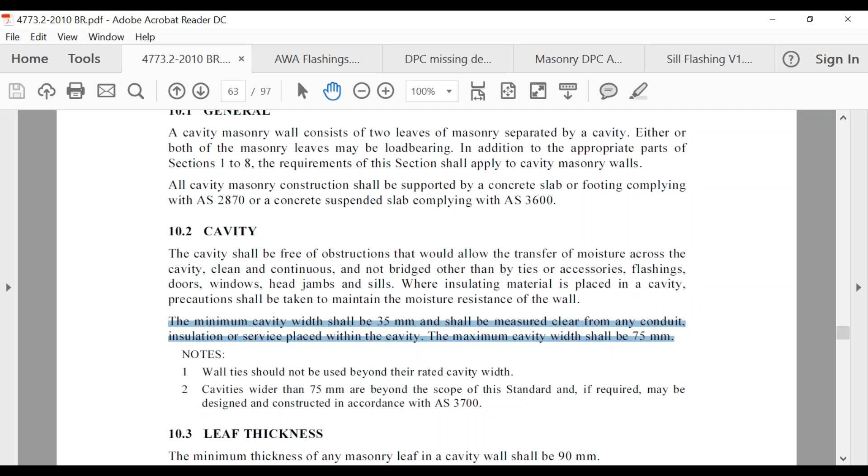Probably the only thing that changes a little bit, and you probably want to highlight this, is the size of our cavity. The cavity width shall be a minimum of 35 millimeters and a maximum cavity width of 75 mil. And that's clear of our conduit, just like it was with our single masonry.

I don't know if you want to highlight these, but I don't think it hurts to highlight it in case you're looking for something in cavity masonry, even though the measurements are exactly the same as what we did before. Same thing here, it's got these measurements again saying our damp-proof coursing has to be visible at 150 mil, 75 above our finished pave, or 75 if it's covered by a carport and so on. Those measurements are exactly the same, but I think it's worth highlighting.

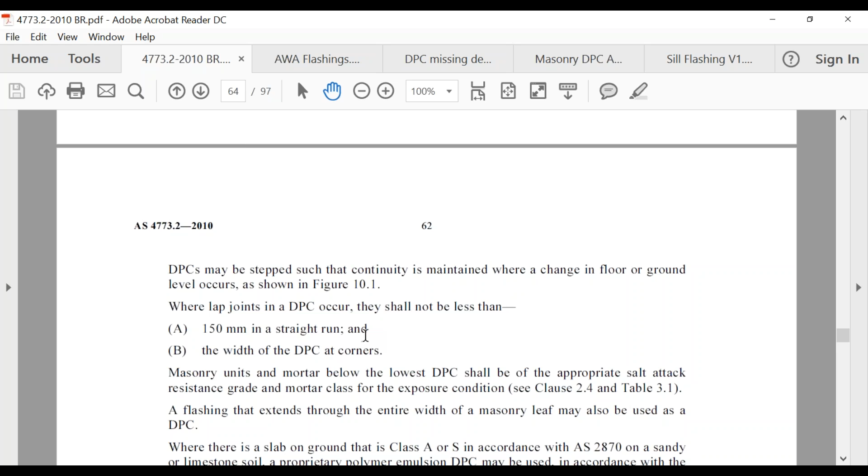When we turn to the next page, exactly the same thing about our damp-proof coursing, how it's got to be lapped 150 mil and needs to be the width of the damp course at the corners. You can see some pictures here if you're not familiar with it, guys, showing us how it gets done. There's some pictures in there as well that show us how the cavity flashings can be done.

And then when we come over, really the same stuff, talking about our weep holes again, that are basically 30 millimeters in the outer leaf, need to go 150 millimeters either side of the opening. It tells us again that weep holes may be omitted from our sill flashings.

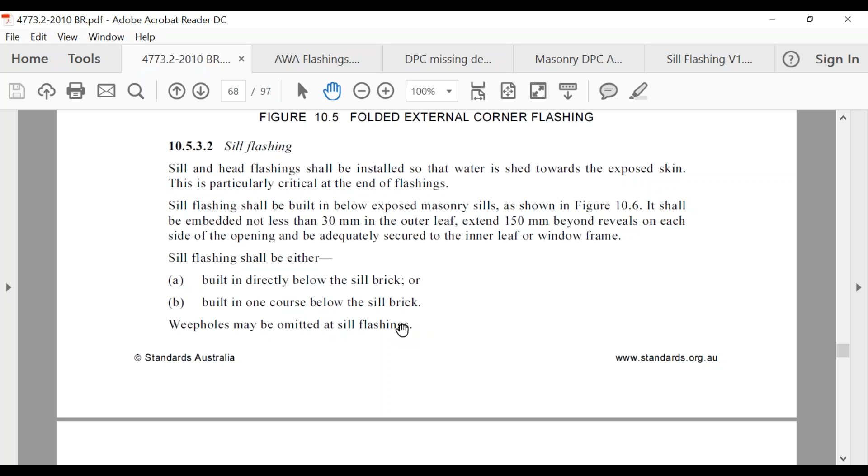Then once we come over, it gives us a few pictures. These are obviously, because it's our full masonry, we've got the 2 lintels and so on. So that's showing us it needs to go up 150 millimeters and then come out through our steel lintel. And that's this, basically talking about head flashings.

The same thing again, talks about 150 mil either side of the opening, how far it needs to be embedded and then turned up, and then drained by weep holes every 1200 millimeters. So yeah, it is the same. Whether you guys want to highlight it, I just think it's worth highlighting so whichever section of the book you're in, you can actually find it.

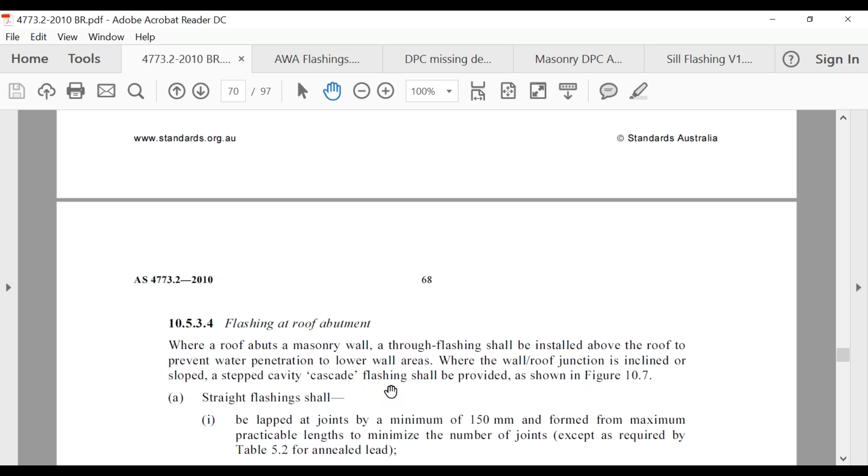Bear with me one sec. I think that's all I had highlighted in my book. So you can hear me flicking over my pages. You'll notice normally with my PDFs I've got them highlighted, but this one I haven't. So those are the things I get guys to highlight and then understand.

So from here, what I thought we would do, maybe as a bit of a refresher also for the guys, is the 2 exercises we are going to do from here. Let me open that up so I get the correct one, and do this exercise here. That one's probably going to take the longest, and for you guys who have done the course before, you probably won't get much different out of it. So what we might do is this one here to start with, DPC missing detail. Let me shrink that a little bit. You'll have that in your folder, and it tells us to fill in the missing detail for articulated masonry veneer.

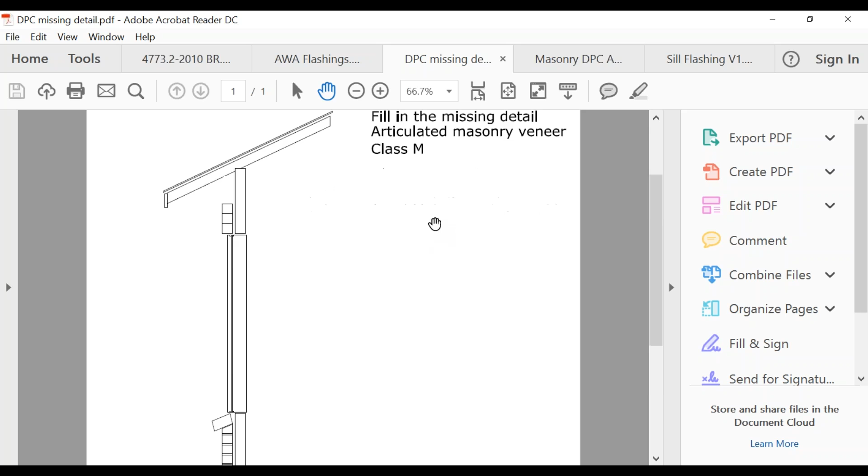So what we can obviously see, we want to put in where the eaves are, and then draw in where our flashing is, nominate how high up it needs to come, how that actually comes out. Because it's basically a Class M, if you've done this before, maybe choose a different class and make it a H1. If you want to practice what your footing is going to be, you can see it's our double masonry, so you can determine how deep that needs to be, our width, and what steel needs to go in it. And basically how big our cavity needs to be, and anything you think's missing.

So we'll do that one now, it might take us 15 minutes. We'll probably go through it, maybe have a bit of a break, then come back and finish that second exercise. For those doing it for the first time, definitely do it as a Class M, and the guys who have done it before, why don't we use a Class H1, and we'll see what we come up with. Once you're done, type in the box and say you're done, and we'll go through the answers, have a break, and then go back onto that second exercise. So do a H1, and I'll try and figure out what those answers are while you're doing it, so I can compare my answers for a H1. Any questions in the meantime, type in the box or ask me, but you'll be sitting here trying to work out the H1 scenario.

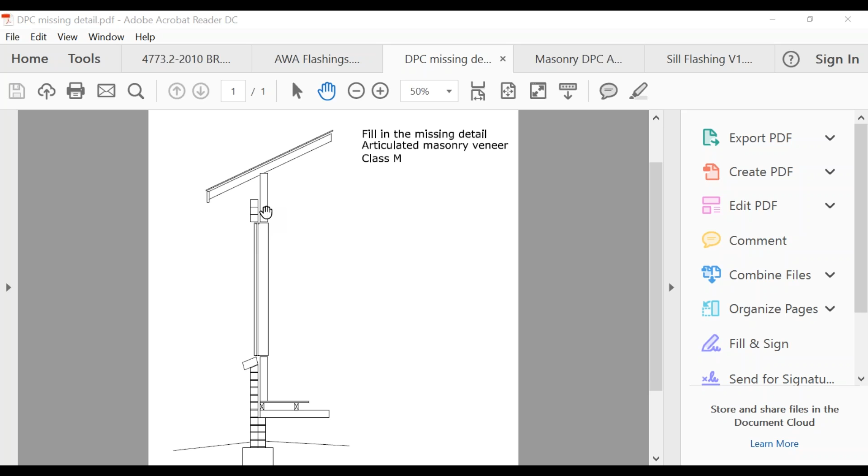But that's pretty much what we should have had there. If you wanted to work out that strip footing, just look at my book. I think it was 600 deep, 300 wide with 3 N16 steel in it. Correct me if I'm wrong, but I'm pretty sure that's what it was, because it said it was basically articulated masonry veneer on an H1, I think, is what I said before we did it.

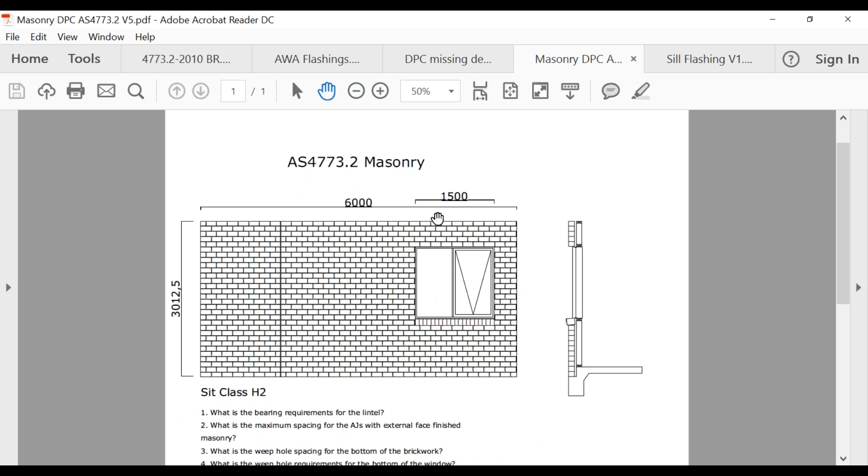This is the main stuff we want to get out of tonight, and you can just reference your standard for it. This is basically giving us our picture. Now it depends probably on who you've done this with previously.

Yeah, no worries, Jeff. I said I do that occasionally.

Sorry, yeah, so basically just go through and find these questions. It tells us the site class is H2, and we want to find out what the bearing requirements are for the lintel. So we'll go back to the Australian standard, look at how wide that window opening is, and then work out the bearing requirements for how much of that lintel needs to sit on either side. Then, what is the maximum spacing for the articulation joints?

Basically just work your way through. I don't think so, but as you get down it might become a little bit challenging, just because they're sort of well hidden within the Australian standard. That'll be some of the questions there.

What type of wall ties, for questions 19 and 20. So basically go through and do your best.

Also question 17, what is the maximum water pressure used to clean brickwork? It's funny, last time I trained this, the bricklayers in my class had that actually referenced from the builder they'd used, maybe sent in their specifications. It said the pressure cleaner must be no larger than a certain maximum KPA, and it was bigger than what the standard actually allowed. That was a bit odd as well, they were using something stronger than what the Australian standard allowed.

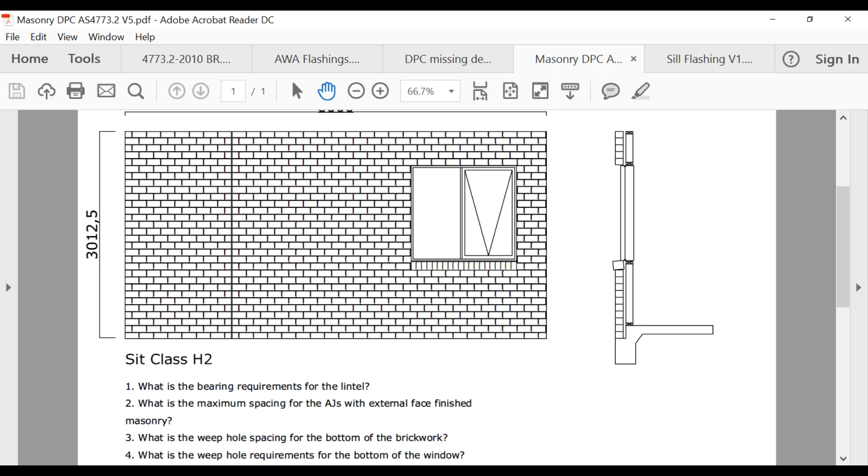I think Jake's the only one who's got to do this from scratch from the beginning, but if you other guys want to go through and make sure you can find them again, by all means do it. Jake, let me know when you're done so you're not sitting here waiting for me for half an hour to move on to the next part. If you've got any questions in the meantime I'll be here, so ask me, otherwise have a crack at that and see how you go.

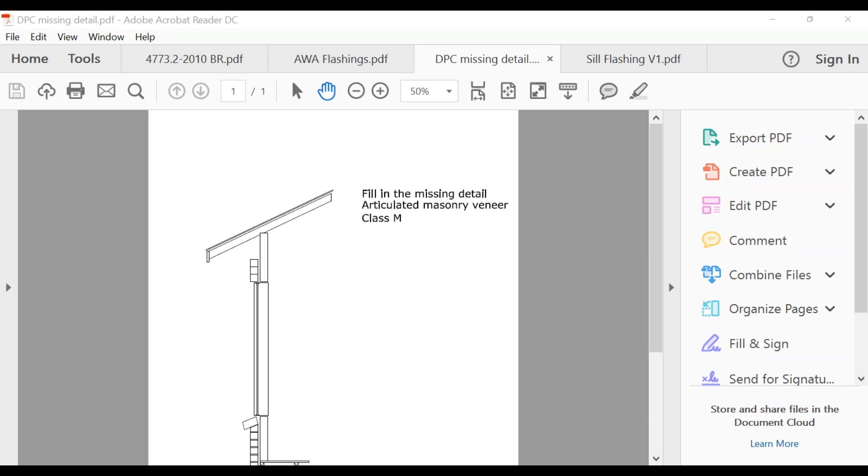I just find it a bit confusing with the answers. I've just handwritten mine in there, so give me a second and I will email this out in case anybody wants it. So all it is, just got basically the answers down the bottom, and a few of them are referenced where it came from, whereas I'll just read through them because my answers are the same. I just find it a little bit easier to read my notes rather than Steve's. So there's obviously the drawing that we were doing.

So what is the bearing requirement for the lintel? That's obviously how much it needs to be supported on each side of the brickwork, and that should have been 150 millimetres.

The next question was, what is the maximum spacing for the articulation joints with external face finished masonry? I've got from page 33 that there should be 10 millimetre joints basically at 5 metres.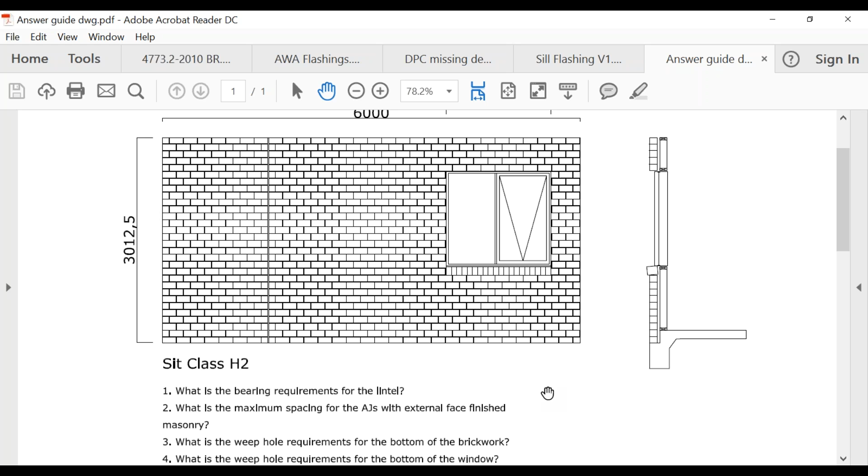Question 3, what is the weep hole requirement for the bottom of the brickwork? So 1200 millimetres, that came from page 50 in our Australian standards.

Then number 4, what is the weep hole requirement for the bottom of the window? When we actually bring up my Australian standard, it did say there that they could be omitted, but depending on how you interpreted that question, I'll just bring up what it actually showed. So give me a second.

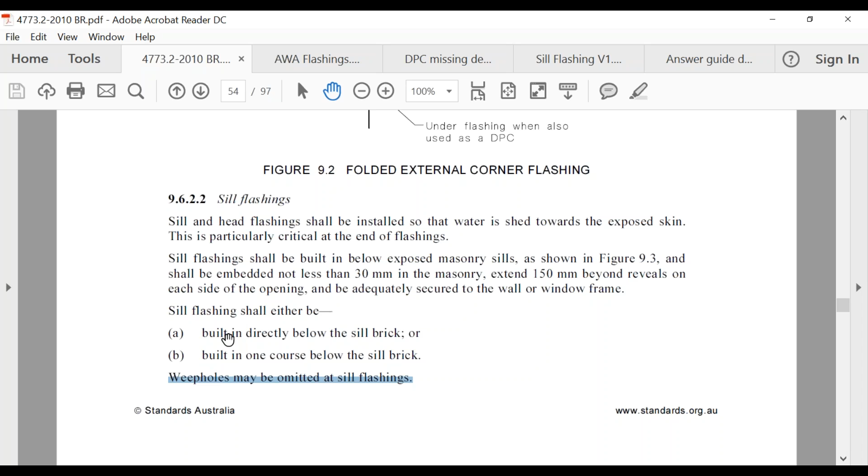This came from page 52 - and this is, I've gone one too far. Yep, so this is, we're on the right page. So this is talking about our sill flashings, for the bottom of the window, and it does say here that they can actually be omitted, or you might have gone with one of these examples here where it says built in directly below the sill brick, or built in one course below the sill brick, which are the examples we showed a little bit earlier.

So then the next question, will you need weep holes over the window if there's no eave? And I've got written yes, but I suppose that's another one too. It depends on how you interpreted that question, and I suppose the drawing.

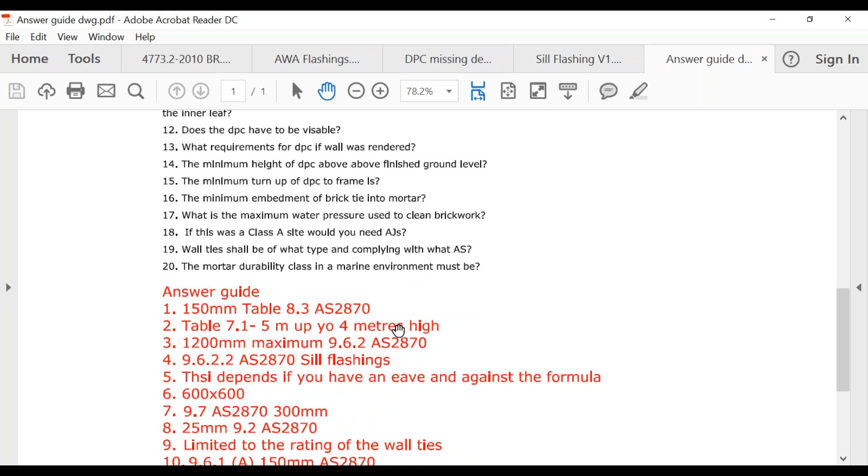So Steve's got here, this depends on if you have an eave and then using that against the formula. Because as you can see here, it doesn't really show us how it goes above there. So I've said yes, but you could argue the case and say, well, hang on, if we use that formula, if I come to whatever it was, we'll just go over that again.

I know Steve hasn't got the date. Give me a second and I'll find it when we get this formula here. So depending on our formula, we spoke about A and B, with B being no more than 3 times of - head flashings may be omitted where A is not less than 3 times of B. So depending on how you interpreted that, you could have used that formula, but there wasn't really enough information in the drawing to get that.

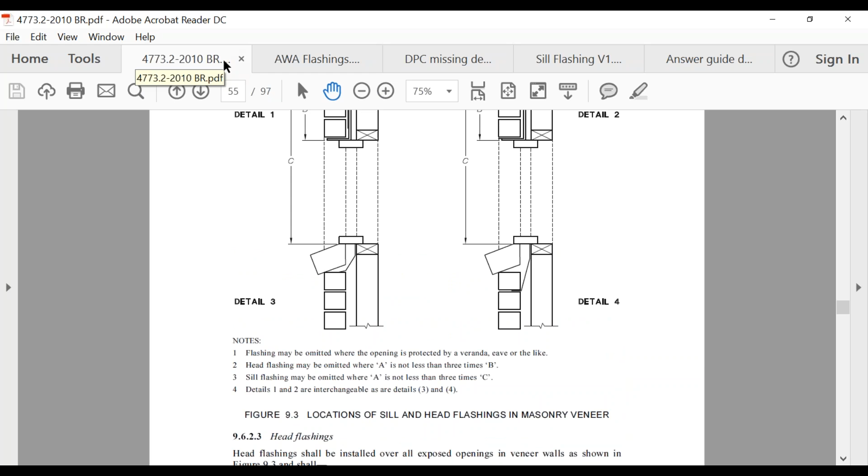So I've just said that we do need weep holes over our window. So then the next one - sorry, just let me find the sheet again. The maximum spacing for brick ties, both horizontal and vertical, is 600 by 600, and that came from page 56.

What is the brick tie requirement at the articulation joint? That would have been the distance, basically 300 millimetres, and that was on page 56.

The minimum cavity for the brick veneer is 25 millimetres, and the maximum cavity for brick veneer - actually that should probably be the maximum cavity for the brick veneer, I've got here 75 mil. So let me just have a look, but I've got a little asterisk next to that. I might have been going to talk about both of them.

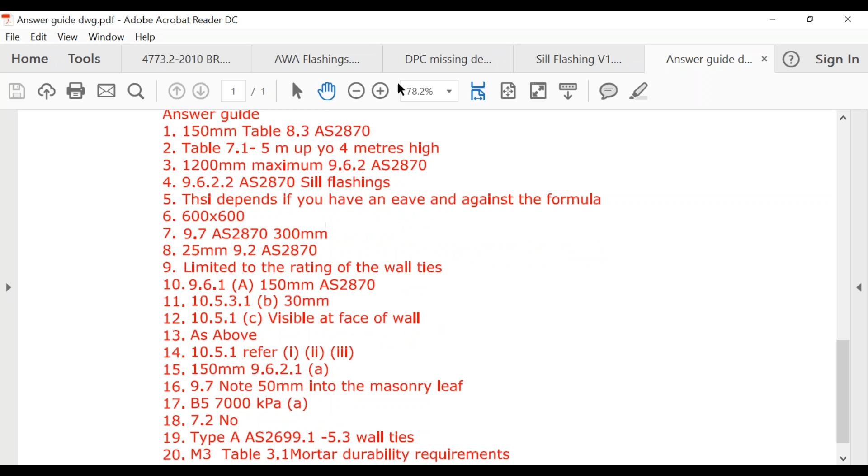So I'll talk about both of them - one of them, when it says that the masonry, from memory, when we're doing a brick veneer, it doesn't actually say like it does. Actually, let's bring it up, it'll be easier for me to show you guys than to try and do it from memory, because that's normally when I stuff it up. So if we come to - and I've got my page number here, page 75. Actually, we'll go to page 48 first.

So this talks about our cavity. This one here is for our masonry veneer walls. It does say the minimum clear width of any cavity is 25 millimeters.

It doesn't actually state it directly, it says the maximum cavity width is limited by the rating of the wall tie as indicated on the package. So basically we would have known that if you read it, that our brick ties have to be embedded a certain distance into our brickwork, and that will determine basically what the maximum in the cavity will be, because we can't have the brick tie sitting in just a little bit. So that's when it gets to what is the maximum cavity for a brick veneer. We actually have to work out our wall tie and so on.

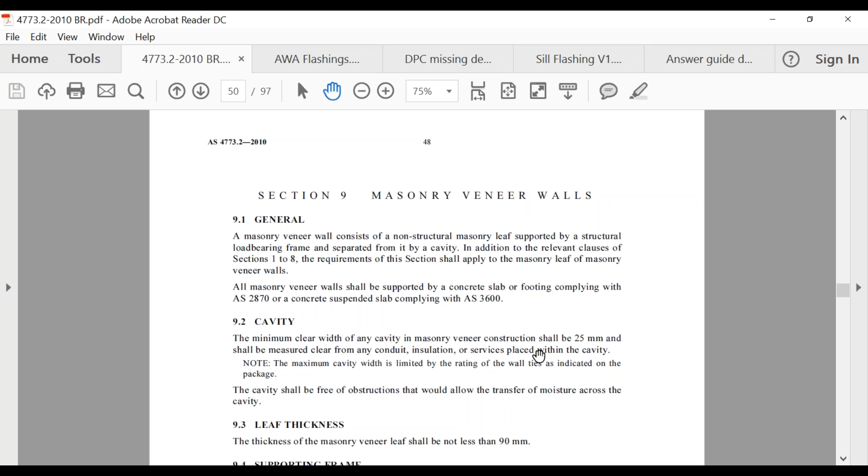But if you did it on basically your double masonry, then yeah, I can find that for you. Let me have a look here. It's going to be down a couple of pages.

So if you were doing masonry walls, that's when it talks about standard measurements, basically 35 minimum and 75 maximum. So just remember, when you're doing a brick veneer, it's got to do with how far that brick tie is embedded, and depending on the size of the tie, we can then have a bigger cavity, just no less than that 25, because that's our minimum.

So then, sorry, I've got so many screens open, you guys probably can't see it because there's so many documents open. It's a bit hard for me to find what I'm trying to open up.

So the minimum lap of the damp-proof coursing in a straight line was 150 mil, and that came from page 49. Then number 11, if double brick, what would be the minimum embedment of damp-proof coursing into the inner leaf? 30 millimeters, that came from page 64.

Does the damp-proof coursing have to be visible? Yes, at the face of the wall. That's on page 61. Then number 13 asks, what are the requirements for damp-proof coursing if the wall is rendered? As above, it's still got to be visible at the face of the wall.

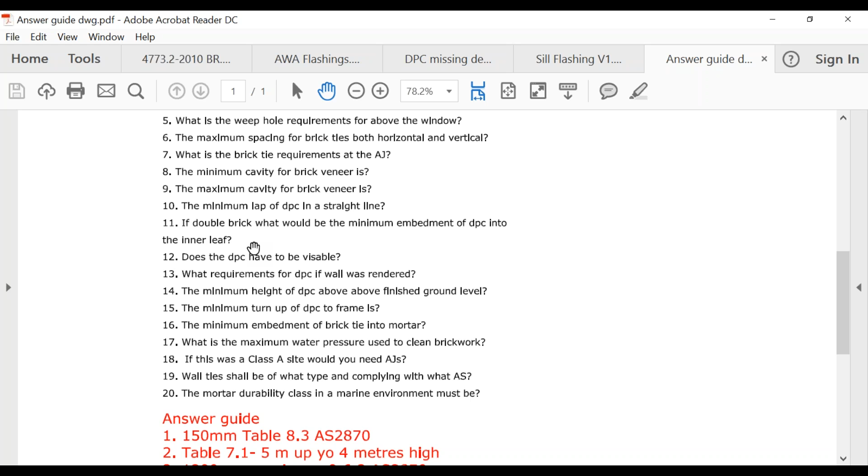The minimum height of the damp-proof coursing above the finished ground level — these were those different measurements we had. If I go to page 61 in our standard, we had our 150, our 75 and our 50, and that was in relation to whether we had paved areas, whether it was protected by a carport and so on. So there's our numbers for that.

The minimum embedment of a brick tie into the mortar is 50 millimeters, so that came from page 57. What is the maximum water pressure used to clean brickwork? That was 7,000 kPa, and that came from page 89.

And if this was a Class A site, would you need articulation joints? The answer was no, from page 32 in your Australian Standard. Then, wall ties should be of what type and complying with what Australian Standard? It should be type A, Australian Standard 2699.1, and that was on page 21.

And then the mortar durability class in a marine environment must be M3, so that was page 16. A lot of guys struggle with that last one. If you've got that, Jake and your other guys doing it, they did pretty well. A lot of guys struggle with number 20.

And some things which guys forget to do when they do this question is, let me bring it up again, basically this section here. We did one very similar. I'm not too concerned if you don't draw it in again, but just be aware of things we want to draw in, like the height of our flashings, basically a damp-proof coursing underneath.

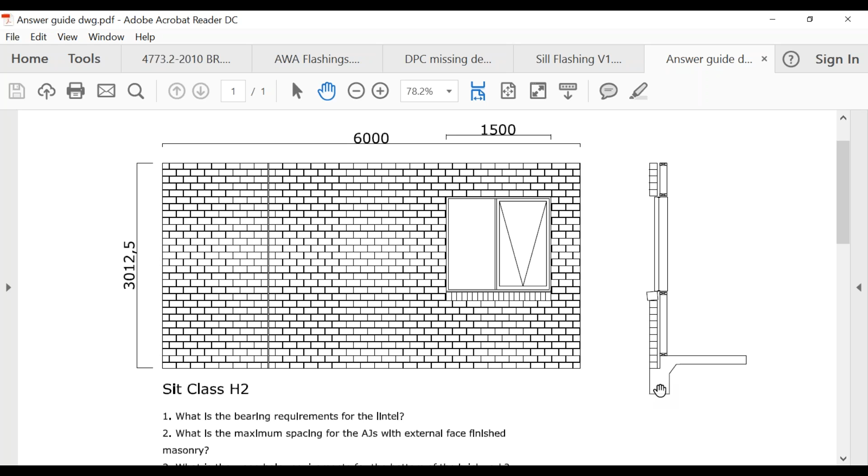So that's basically what we would have got, you know, if you filled that in. And I don't know if I missed anything else off there.

As I said, guys, I thought this would only take till about 8 o'clock tonight. And I normally say to the guys, okay, let's now start practicing those tests. Is anyone here who's basically completed the course and waiting for their interview date or their multiple choice not got a log on to our multiple choice?

If you go and just, what is your multiple choice, Adam? Let me know and I'll bring it up on the screen and show it to you, and I'll try and organise a log-on for you. So is there anyone who's waiting for that, or you've all got it? Probably other than Jake, because Jake hasn't finished the course yet. But anyone else needing that?

Yeah, you can get a log on, Ben. No worries. Also, have you actually seen it, Ben, and how it looks? No, Jeff's got it. Yep. No, you haven't. Okay, so what? Because from memory, Ben, you're doing the non-habitable structures, aren't you? Is that right?

Yep, cool. So what I'll do, I'll just show it to you. That's not real handy - when you go in, Ben, you'll find that you'll just go straight into an interview.

But I think this is a good way, even for the guys, because this is going to be based at a DBU level, also the guys going for DBM or their carpentry license. Don't be disheartened by a lot of it if you don't know it, because you won't be tested on it. But I've found the guys going for those limited licenses still like to do it just to test their knowledge, because they've done the whole course anyway, and then they can test the stuff they'll know. So when they get questions on contracts, permits and stuff like that, that's across every license, it's a good way to actually practice those as well.